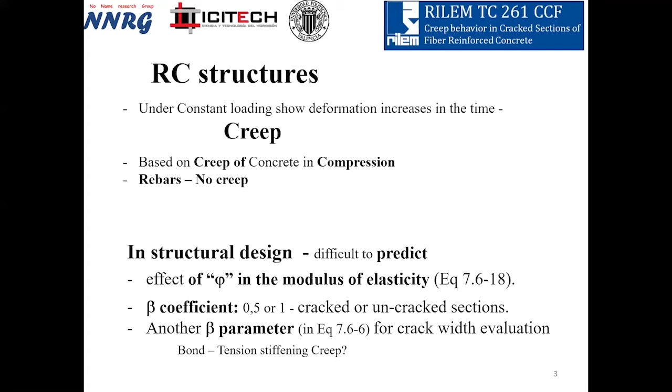Starting on reinforced concrete, when we talk on creep, we are always thinking that creep depends on the delayed deformation in the concrete because of compression. We usually consider that rebars do not creep. For structural design, which is not too clear to predict even in traditional reinforced concrete, we usually affect the modulus of elasticity by a creep coefficient that changes the deformation over time. We can also apply some beta coefficient thinking on whether the section is cracked or not, or other parameters related to evaluation of the cracks.

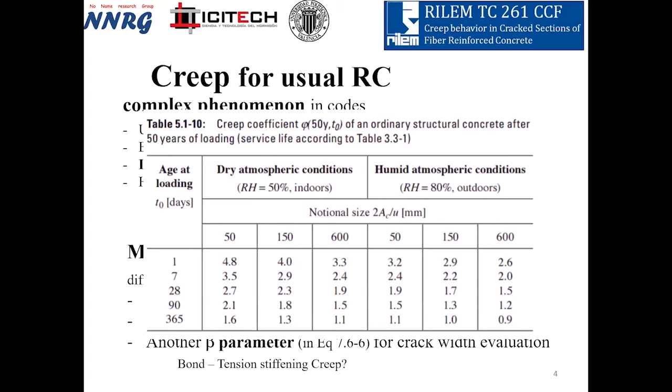Finally, we have usually a table like this where we apply different coefficients that can change a lot, and we have no logical defined criteria even for standard concrete.

When we introduce fiber reinforced concrete in the model code, one of the first aspects is a warning: if you use synthetic fibers, you must consider the possibility of a creep effect of the fibers itself, and you must take this into account. But there is never a criteria to evaluate that. There is no criteria to apply creep in fiber reinforced concrete, whether synthetic, steel, or other type of fiber. Even in the upcoming Eurocode 2, only steel fibers are accepted and others are not. Why? Maybe because we continue with the warning, lacking experience, or we panic thinking on creep.

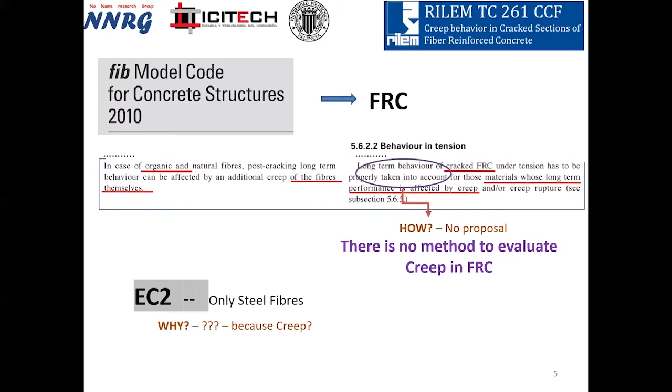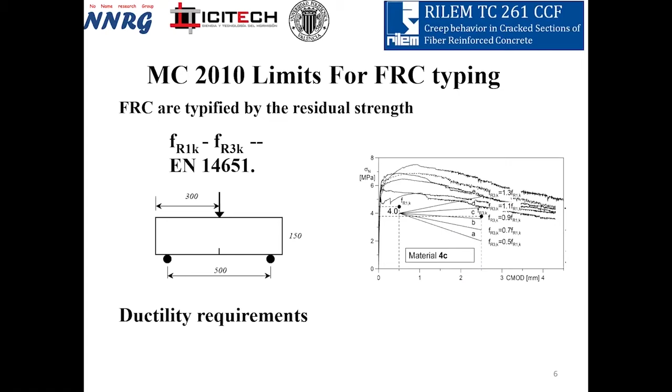Fiber reinforced concrete is usually characterized by a flexural test on a notched specimen, defining two parameters: the residual strength after cracking at a low crack opening of 0.5 millimeter, or a long crack opening of 2.5 millimeter, thinking on serviceability or ultimate limit state. With this concept, we developed lots of structural behavior aspects with fiber reinforced concrete.

It's clear if we try to analyze a one-direction structural element using only fibers, you will have a crack, and the fibers are responsible for the equilibrium. In this case it's clear you have problems, or you must consider the effect of long-term behavior of the fiber in this crack, because if the fiber reduces its contribution, deflection will increase.

Even in this case, you may work at a very high level of fiber content or residual capacity of the fiber reinforced concrete, or you work with an adequate safety coefficient, and then you work with non-cracked specimens.

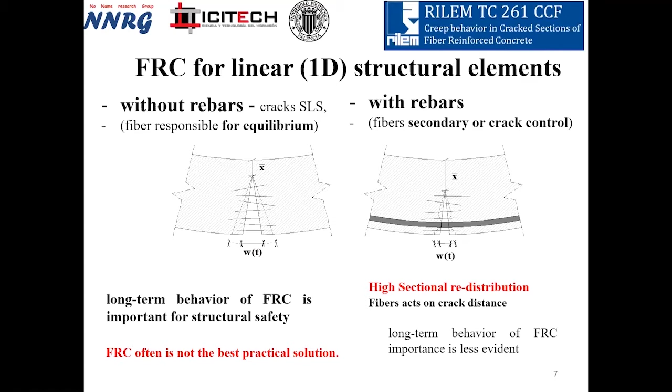In the right case, when you work with rebars, you can have a crack, and in this case you have a big redistribution. If the fiber has a loss of capacity because of creep, this loss of capacity is always absorbed by the rebars. In this case, maybe the effect of creep is not so important. So usually we work with that, but if you think in fibers, usually you think of a very structural redundancy, and then we work on 2D or 3D elements.

Then thinking on big redundant structures, the creep effect will be diffused into the redistribution of stresses. When you really need a problem is when you work in a 1D element without rebars. Even for other effects like shear, usually we work with sections where you never have cracks in service.

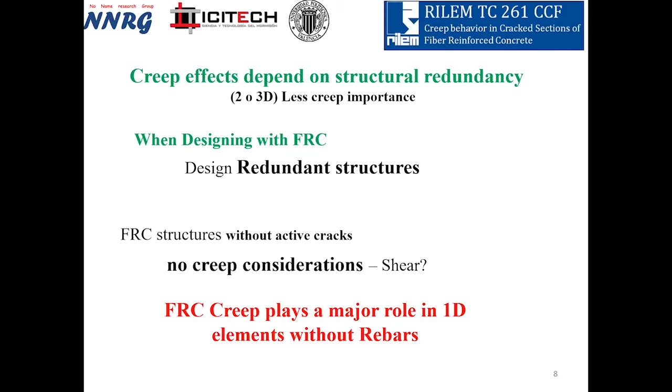It's clear that creep is a phenomenon that happens that we need to consider in service conditions. Then for shear, usually creep is not an important problem.

Then we need to look for a creep test, thinking on fiber reinforced concrete and at the material level in cracked sections. This way we will characterize this problem of characterizing the material, and be able to translate these concepts to the structural issues of structural design.

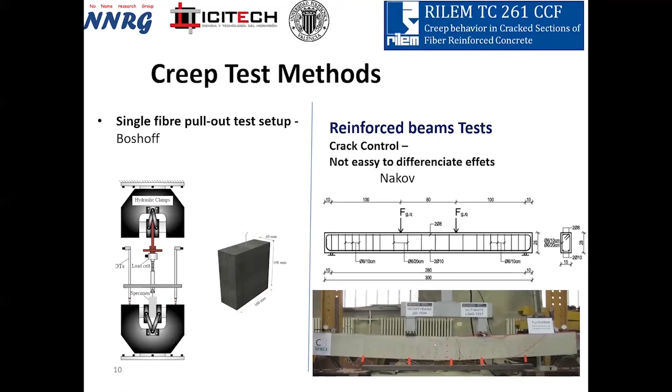Well, if we look in the bibliography, we have lots of different methodologies. There are people working on pull-out tests of single fibers inside the concrete, or people trying to test reinforced concrete and analyze the difference between a fiber concrete and a normal or structural concrete.

Well, it's clear that thinking in the previous concept, the important thing is to define the behavior of the material, not the fiber alone, nor in the big structures, but to think in the material.

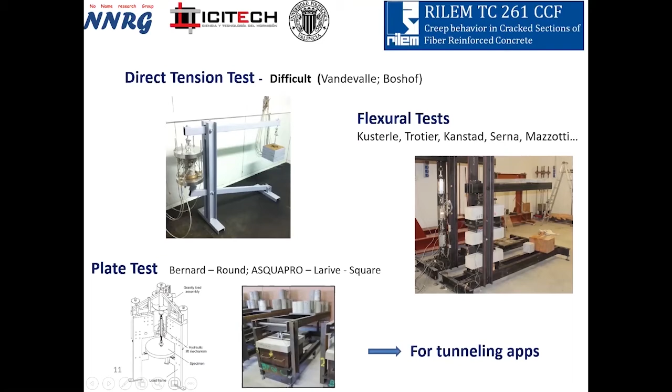This is the most frequent in the market of the research. But when you are working in tunneling, usually people use square panels. They make a square panel supported in all the contour and apply a central loading, thinking on the effect of supports on the tunneling concrete.

Well, it is clear that if we want to understand the material, the most clear and simple methodology is the direct tension load, clear to understand, but it's very difficult because it's not a stable test.

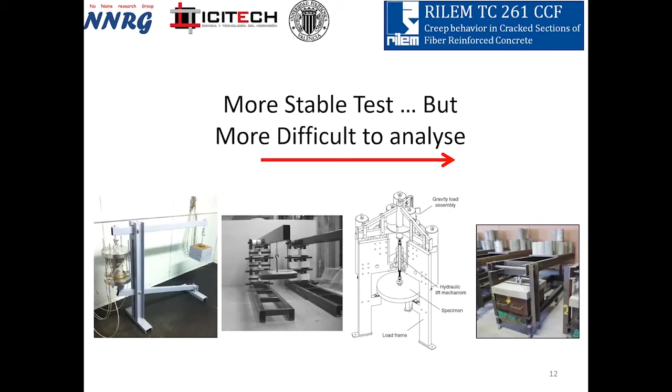If we are thinking in creep, we need to think in a one year or long-term test. This is difficult to be done, but if you go to the opposite, to plates, the problem is to understand what happens in this test. Then the more easy the test, the more difficult it is to understand the result.

There is a final question that is important to detect for all the methodologies we know in the bibliography: no matter what the methodology, after a creep test, a long-term applying load, if we analyze the residual capacity of the elements, you have the same capacity as elements that were not pre-cracked and not applied in the creep test.

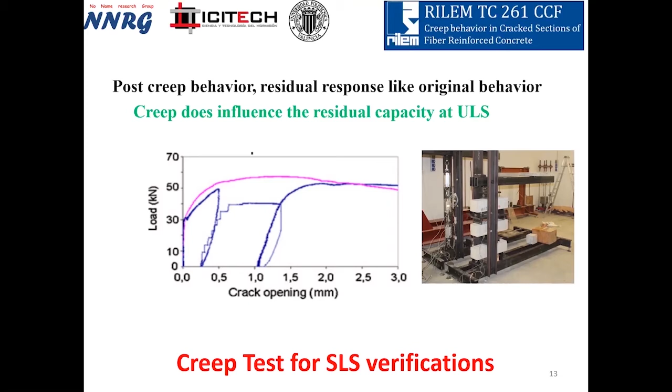Then for ultimate limit state, if you don't have a problem in the service time, you have always the same ultimate capacity. Well, in this way we try to organize...

Because we detect that there are lots of very different methodologies, we organized a RILEM committee. I was selected as the chairman because I was the only one proposed for that, and as secretary Sergio Carmona was accepted to collaborate with us, and Aitor Llano, who is my main support at the Polytechnic University of Valencia.

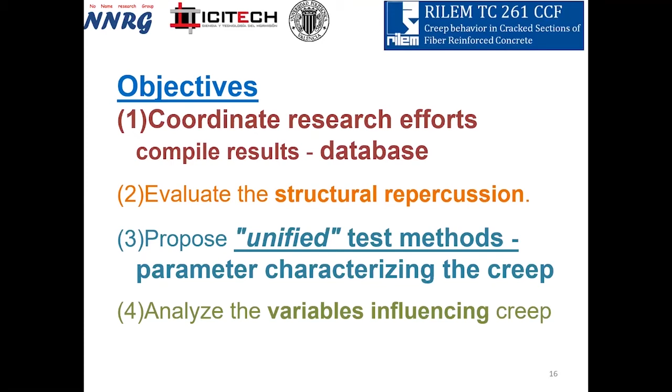The objective was first to coordinate research efforts and generate a big volume of data to be able to compare different methodologies, analyze the structural repercussions, and propose a unified test method. Of course, not only the unified test method, but also the parameters that will characterize the creep, and if possible, to analyze the variables that influence creep.

The group started working, and we had 12 meetings in different points. We had more important attendance when we worked in coordination with an important other event, in the creep workshop or the BEFIB of 2016, but in all the meetings we had at least 12 or 13 people.

Well, as activities we proposed first to organize a workshop, then to propose a big round-robin test, and to finish with a test methodology. If possible, we also wanted to organize a state-of-the-art, which we considered necessary in the same process.

Well, the workshop was the easier activity. Of course, if you talk to all the people working in a topic, it's relatively easy to meet. We selected Valencia for the meeting, and I think most of the people working in creep were there, and they are also the people that worked in all the activities of the technical committee.

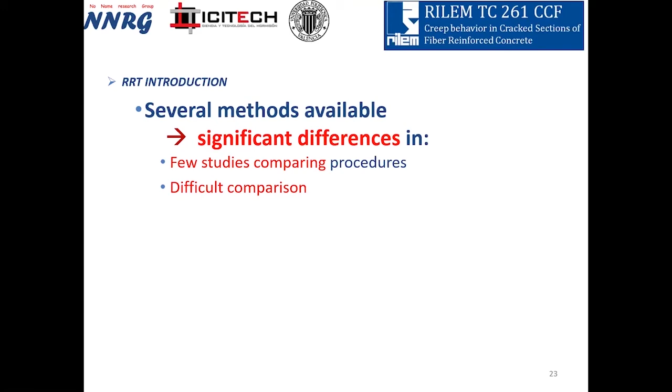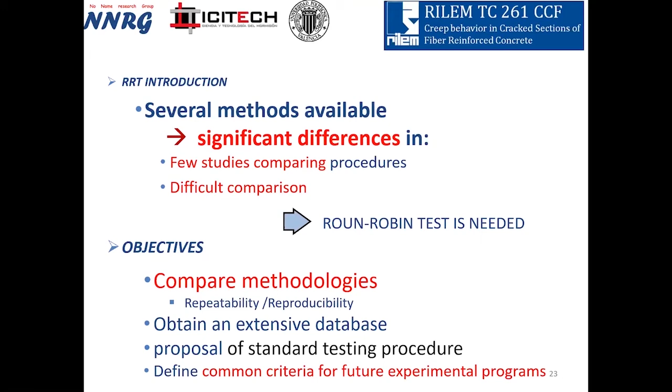The second idea was to organize a round-robin test. Why? Because we have lots of methodologies. Each researcher uses their own methodology with significant differences, and there are very few studies comparing different procedures, making it difficult to compare. So we proposed this round-robin test, with the objective to compare and select the most supported methodology, based on experience, to be proposed as a standard procedure.

The idea was to produce only one concrete, normal strength concrete, 35-45 megapascals in compressive strength, with only two variables: the type of fibers. We worked with synthetic fiber and steel fibers, and of course the main cost of the project was supported by the fiber producers.

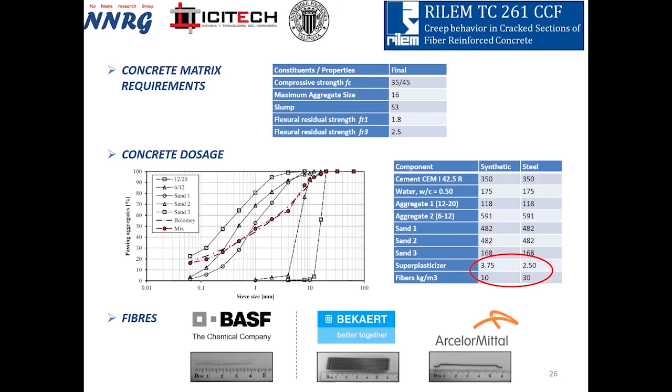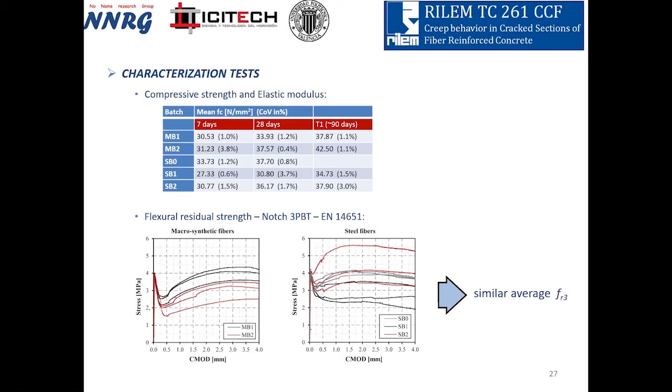Two types of fibers, but thinking of a similar structural behavior: the same capacity at ultimate limit state, the same FR3 for both elements. We produced that with good capability, and of course the dosage of fibers is not the same, but the mechanical properties, the performance of the concrete at FR3, are similar.

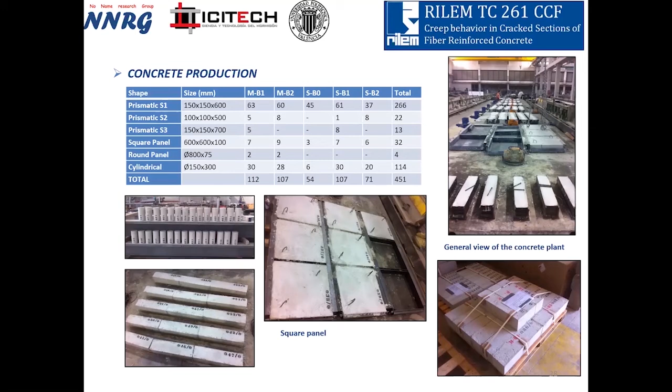The production was a volume of 20 tons of specimens that were cast close to Valencia and distributed - only one point of production - then distributed everywhere in the world with different test methodologies.

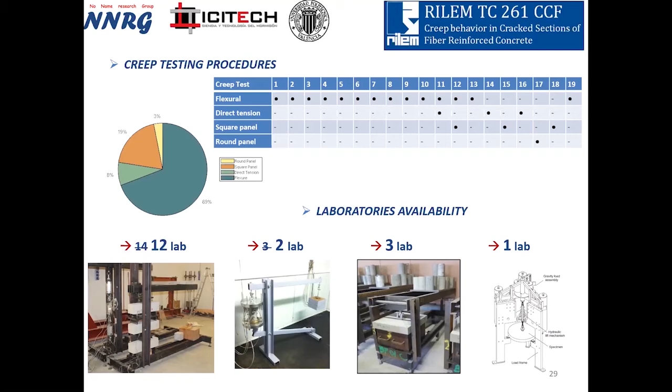What technologies? Well, all the participants selected their own or recommended methodology and how many specimens they were able to test. This is the list of different methodologies, and as a starting point result we have 12 laboratories working in flexural, only 2 finally working in direct tension, 3 in plates, and only 1 working in round panel test. So there are lots of test methodologies, but not expertise in all of them.

In a creep test, usually thinking of a flexural test for instance, but similarly applicable to others, we organize a specimen that in this case is pre-cracked. We apply a load until crack and residual crack opening, obtaining the residual capacity. We unload the element, leaving it pre-cracked.

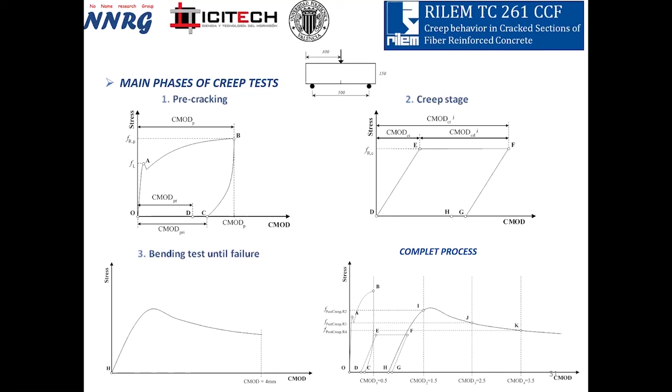This pre-cracked element we then send to the creep stage. In the same conditions, we apply a similar load, a percentage of the residual capacity of this element, and conserve this load over time. For this case we used one year of load application as the creep stage. After the creep stage we unload the specimen and reload until failure. So we have a complete process: pre-cracking, creep period, and post-cracking until failure, allowing us to evaluate residual capacity.

One of the points is what we want to analyze. If we want to analyze the creep behavior, we must think in service conditions, a crack opening that can be assumed in service. We selected 0.5 millimeters for flexural, 0.2 for direct tension, and 2 millimeters as deflection in the panel test. The reference, since we're thinking of service, is the FR1 and the capacity after pre-cracking.

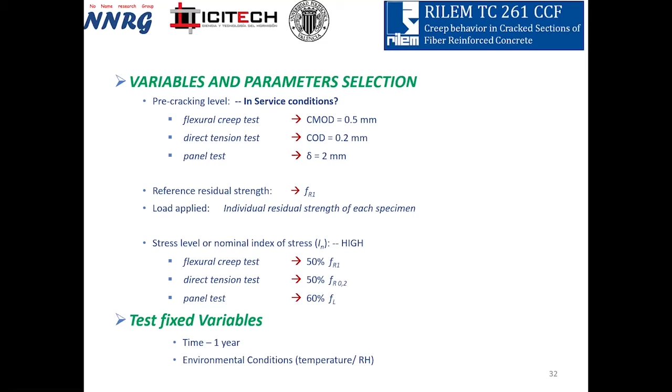The percentage of the maximum load, the residual load in this case, is usually accepted at 50% or 60% for the panel test. This is interesting because for service condition we usually apply a lower value since we have low capacity, but because we want to conserve results, if we want a meaningful result we need to go to a higher level. This is why we apply 50% rather than a lower value that may be more frequent in service. Of course the time and environmental conditions are the same.

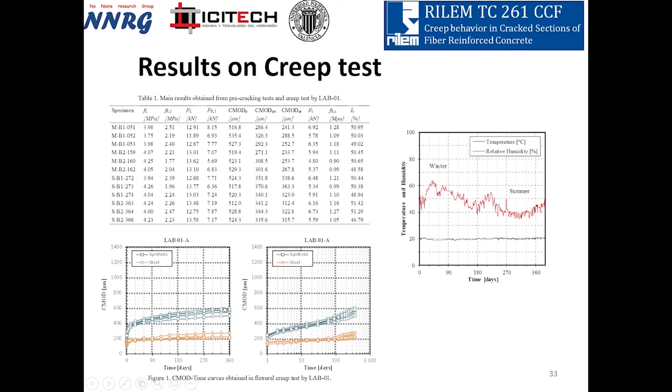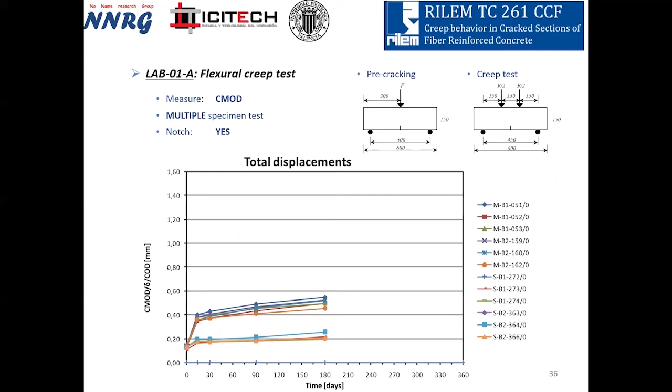We asked all participants to send us all the results of their process. For each laboratory we have the results of pre-cracking and several points during the whole production time. The first point is that we have lots of variability. We expected that because we have different methodological details, even when talking about the same methods, but we are able to compare all the details.

We did a previous study analyzing the variability of results. Of course, with the fibers, we are able to separate the effect of different factors - that's very important because the statistical analysis was able to produce that. Fibers are influential and have a clearly different effect.

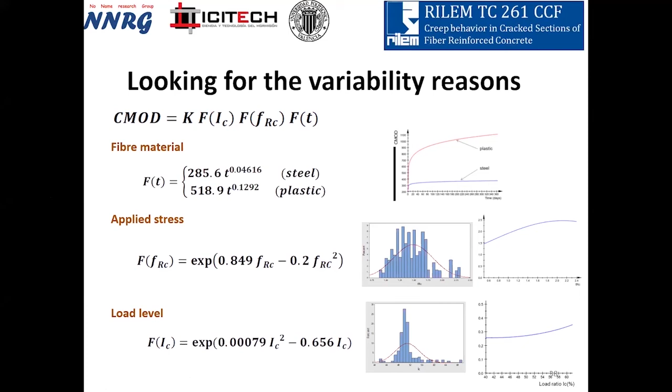The load applied and the intensity of load applied are also important, but as we always work at a relatively constant value, these values are not too influential in the final results.

We also detect the effect of the type of laboratory working. We were able to classify laboratories in clusters: cluster A with 7 laboratories, cluster B with only 2 laboratories, and 3 individual laboratories that clearly produced a methodology clearly different. This is thinking only in flexural test.

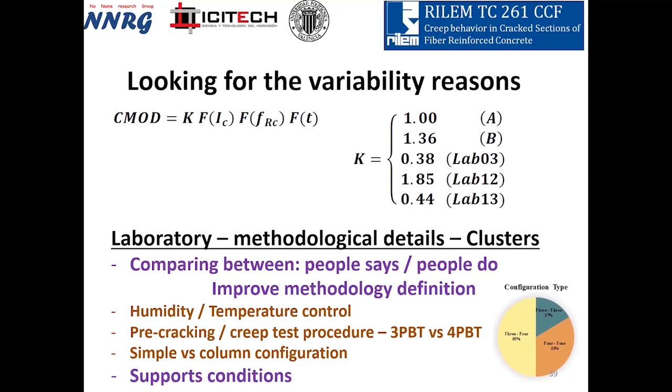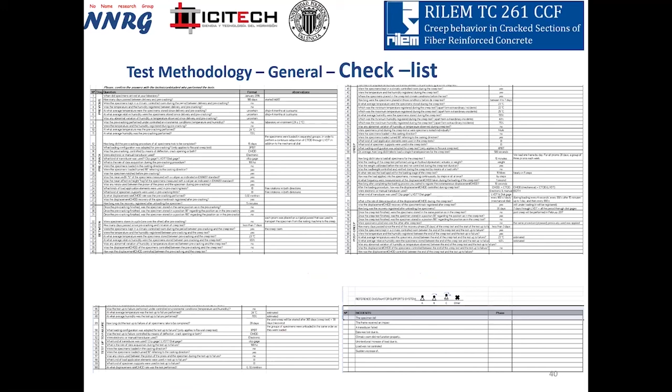We did important work trying to analyze those phenomena and what are the influent parameters. One of the most important was to compare what people say and what people do. To analyze that, we organized a very big checklist sent to all the laboratories to assess not what you think you are doing, but what are the details of your procedure - including pictures of the supports, pictures of the procedure, pictures of the system of application, times in all the process - so we are able to justify why those differences occur.

It's clear that in flexural testing you have cluster A that is the most supported by all the laboratories, and cluster B that has two different aspects: working in single specimens and applying only central load, changing a little the criteria of the procedure. But only two laboratories are able to do that because they need lots of surface for the same test.

For the square panel, the result was very different because each laboratory applied a different level of load, even though it was prepared to perform that.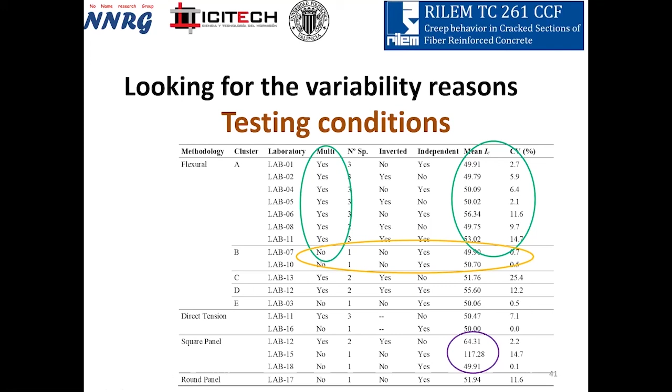In round panel we have only one laboratory, and direct tension is feasible, but the number of specimens was very low and the number of laboratories is also low. Then it's difficult to guarantee a methodology to be supported by the standard.

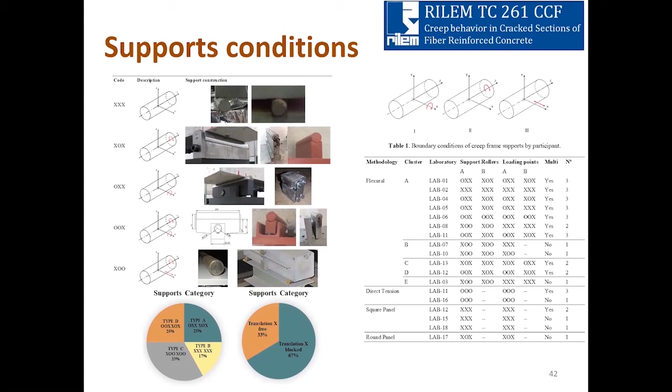The support conditions were also difficult to understand, but I think it's less important as an influence - though the details must be coordinated.

No, I finish in 2 minutes. I have 2 minutes, okay, sorry.

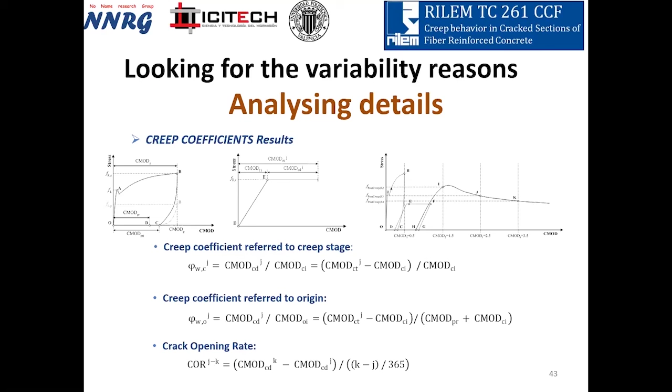We also analyzed the creep coefficients, where we had a problem detecting what was the instantaneous load application, because the time of applying the forces was fast in some cases and too slow in others. So we decided to think in a creep coefficient, thinking in a definition of the time to apply load.

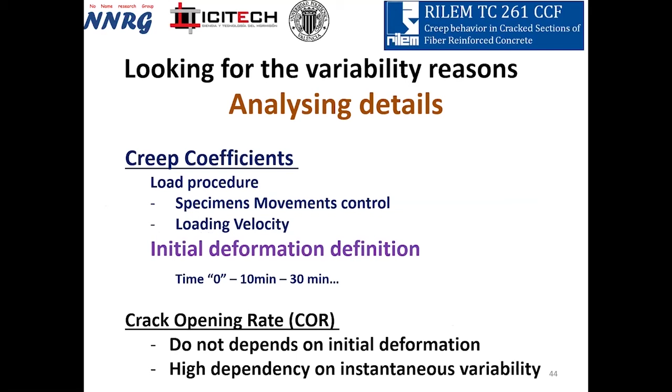Defining the crack opening rate is more difficult to justify because we need a tendency curve to be able to define it. And with that, we have the results.

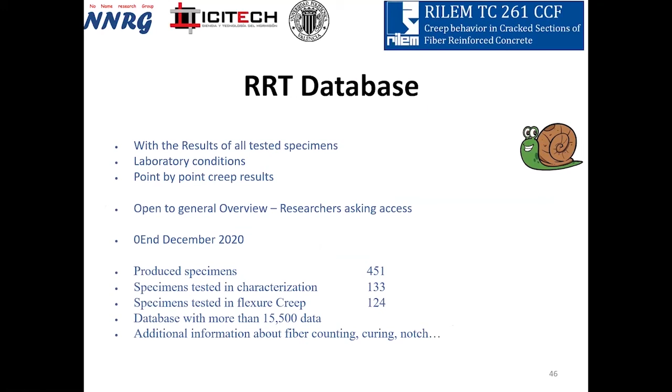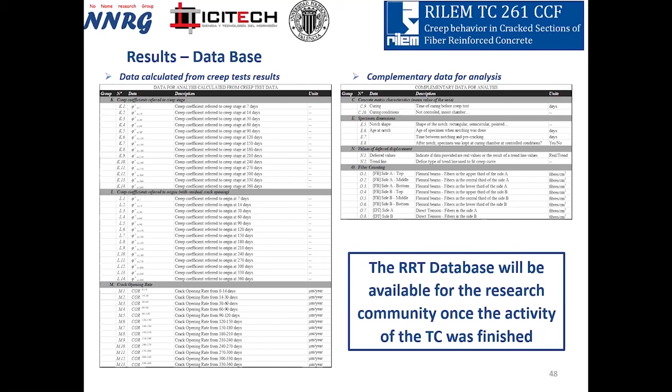The result is a big database with more than 15,500 data points on the results of the test. This may be important - here is a picture of the different data that you have, and this database will be accessible for all research publicly, to be able to analyze that.

Of course, we will produce the round robin test report to be published as a RILEM state of the art, which must be finished this month. And this is the index. You will be able to produce a recommendation from it.

At this moment, the recommendation focuses only on flexural test with the concept presented here, with all the details in the procedure organized. This is the index. The only question is whether we conserve or not the crack opening rate as a reference, or we assume to keep out this detail.

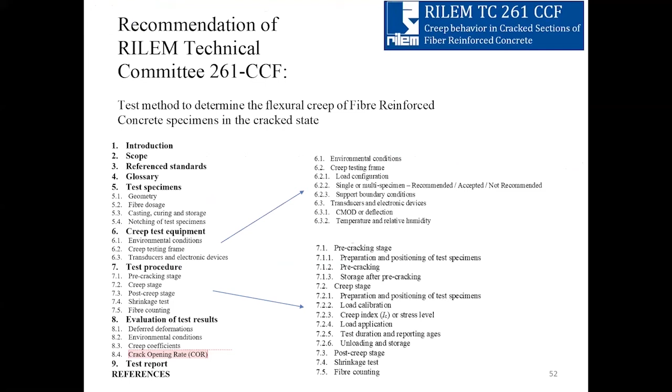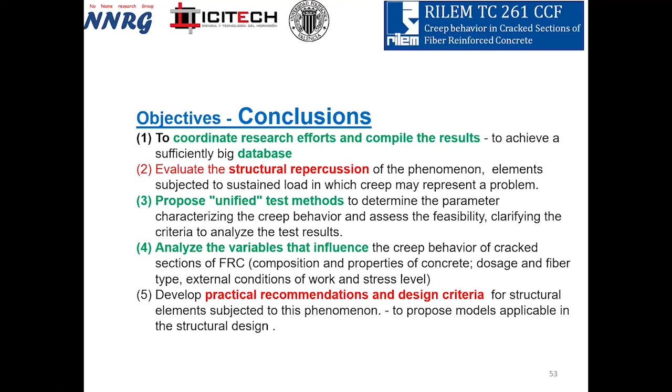The objectives, I think, are supported in the first part. Maybe we need to continue, or we need other people to continue thinking about the structural repercussion of this effect. But the test methodology will be proposed maybe this week or in the next days. Thank you for your attention, I'm sorry for the time.

No problem. Thank you, Pedro, for this nice overview of the work of your technical committee. Clearly a lot has happened in this period.